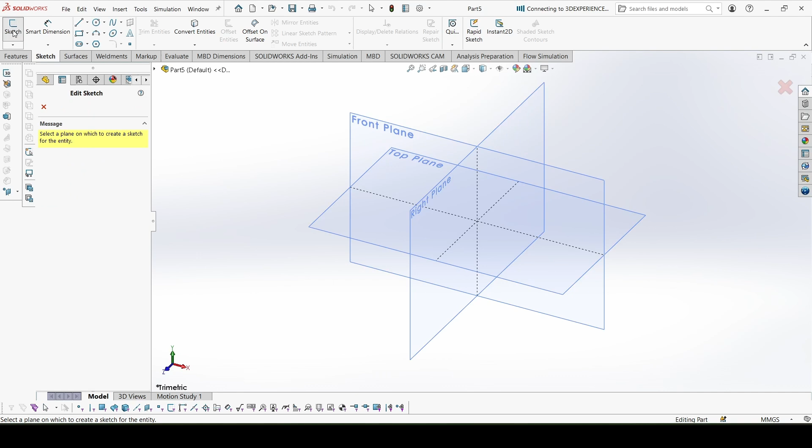Let's go to SolidWorks, import. Now in this one, we'll first make the base in the top plane.

So let's just create 2 circles, one here and one here. The dimensions would be 20 plus 6 into 2, because the inner circle is 20. We are making the outer circle right now. So 20 plus 6 into 2, that is 20 plus 12, that is 32.

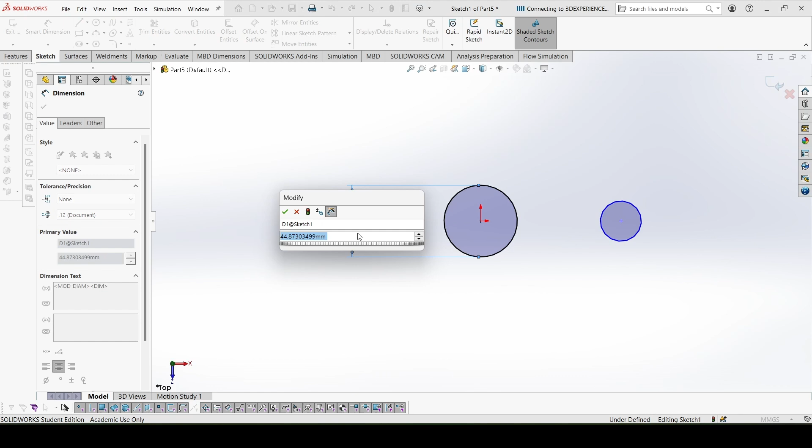And this circle is again 6 plus 6 into 2, that is 18. And the distance between these two circles is 38.

Now we'll connect these circles using 2 lines such that they would be tangent to the circle. We can just create a center line over here, and the sketch is defined completely.

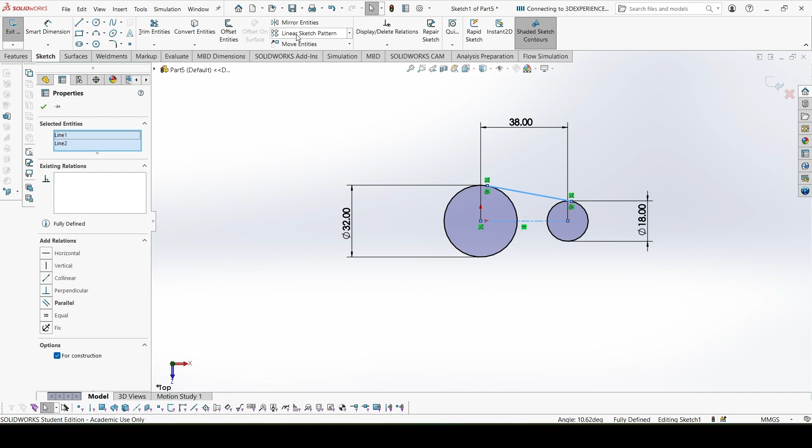Now what we'll do is we'll select this line and the center line and directly do mirror entities. This is done. Now we need to trim the inner parts. So this is also done.

Now let's create the inner circles. This one is 20. Here the inner circle. This is 6.

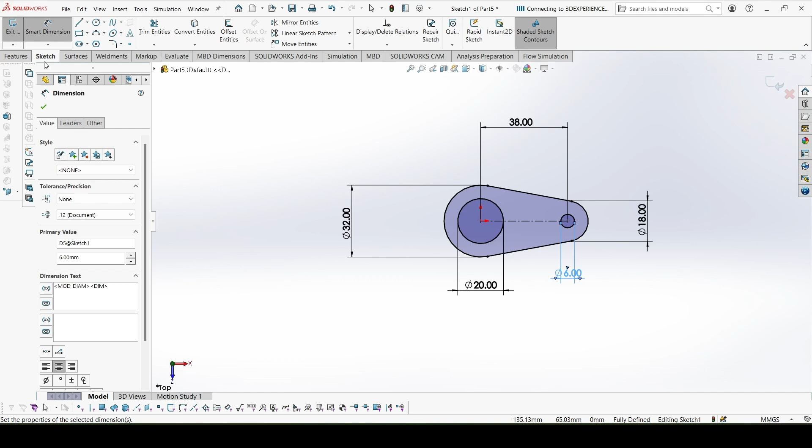Okay, so let's extrude this now. Extrusion is 6 mm from the front view. Okay, this is done. Now let's sketch on this plane.

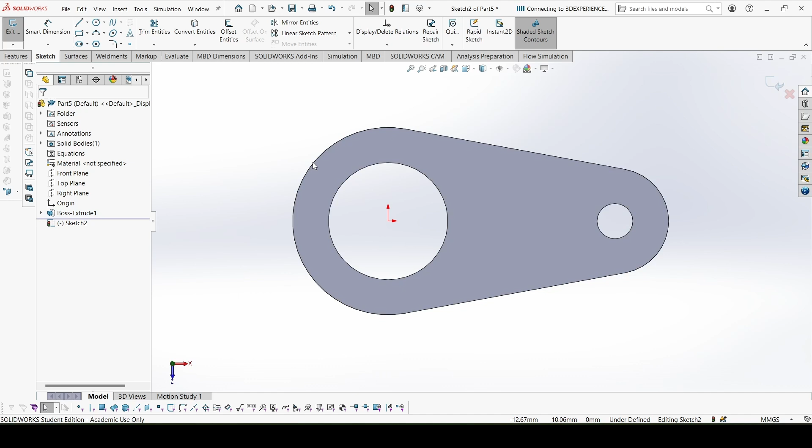Let's just select this circle and this one and convert entities so we can get these. We don't actually need this circle, we just need the inner one, and we can make the outer circle.

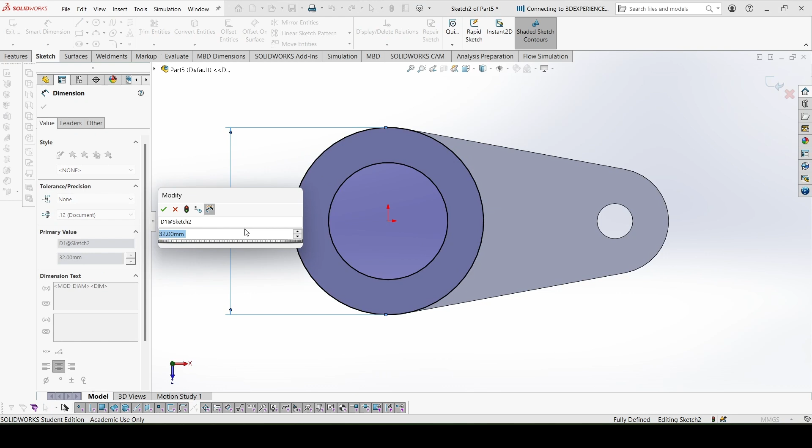Let's give the diameter 32. Okay, so let's extrude this. Their total extrusion is 14, but we already have 6 mm, so we'll make it 8 mm. So 8 plus 6 would be 14.

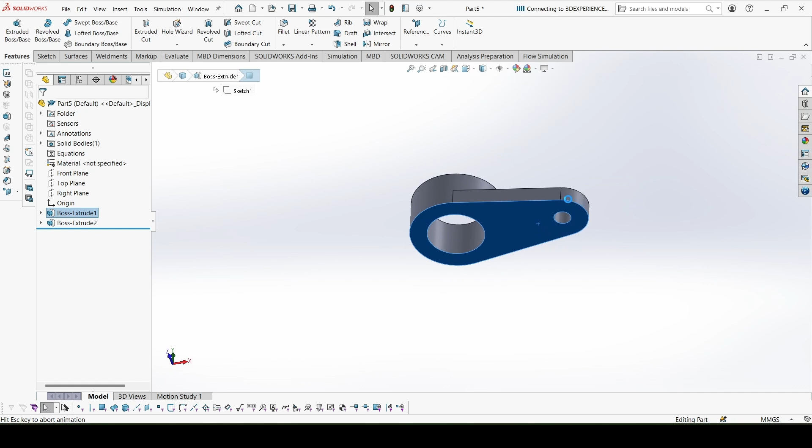Now the bottom part, again we'll just convert entities so we can easily get the inner circle and we can make the outer circle, 18. Now let's extrude this. This is 24 mm.

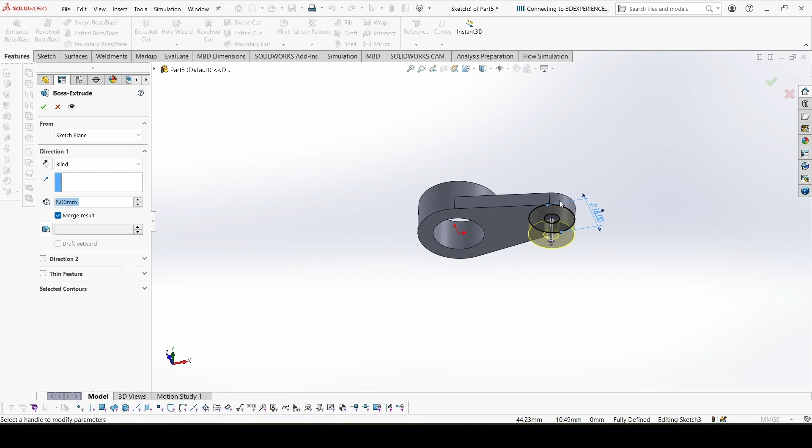So the part is now completed. Let's define the material. The material is steel, galvanized steel. It is over here. Apply and close.